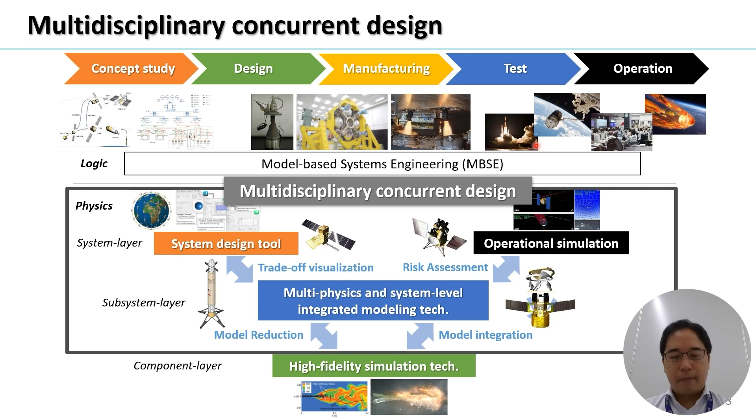Next, I'd like to introduce our target and application of the multidisciplinary approach in JAXA. First one is an innovative space transportation program. JAXA promotes research to acquire the innovative technologies necessary for the realization of the next generation mainstay rocket, aiming at significant cost reduction and new space transportation systems in the private sector.

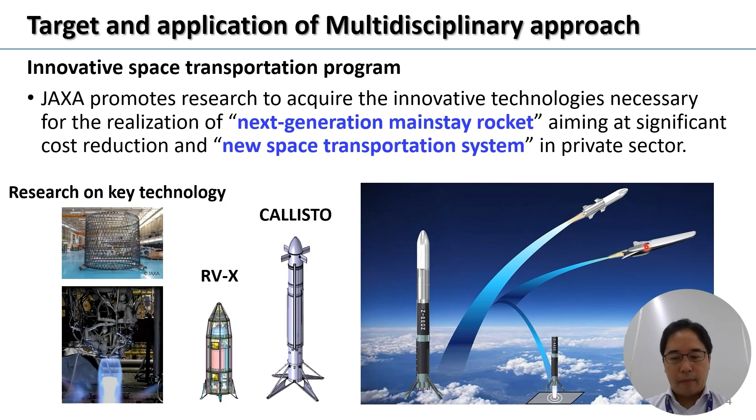Second program is an international space exploration program. When activities are extended to the moon and beyond in the future, it will be essential for Japan to enlarge its space transportation capability from the ground to the orbit and for the moon and Mars. To enlarge the range of space activities and possible missions, automated rendezvous docking technology is gaining importance. So, we are applying the model-based approach for the development of the automated rendezvous docking system in this study.

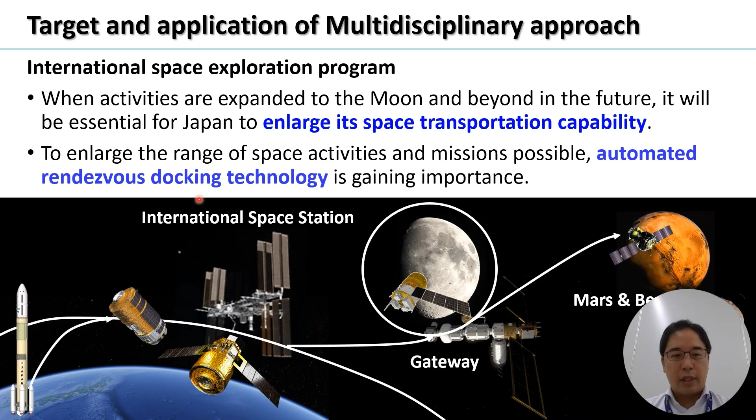So I'd like to start my introduction of the use case of the SimulationX targeting the reusable launch vehicle landing system. As you know, research and development on reusable launch vehicles are progressing worldwide with the aim of significantly reducing the cost. JAXA is also conducting flight experiments we call RV-X and Callisto to demonstrate guidance and control technology, propellant management technology, and between-flight reconditioning, which are important for realizing reuse.

RV-X is a small-scale vehicle demonstration by JAXA. We are going to carry out the ground test in Japan, and we obtained several test data to realize a reusable launch vehicle. And also, we collaborate with the French CNES and DLR on their demonstration of the reusable launch vehicle we call Callisto. We are planning a step-by-step approach to obtain the technology to realize the reusable launch vehicle towards the future application of the Japanese reusable flagship launch vehicle.

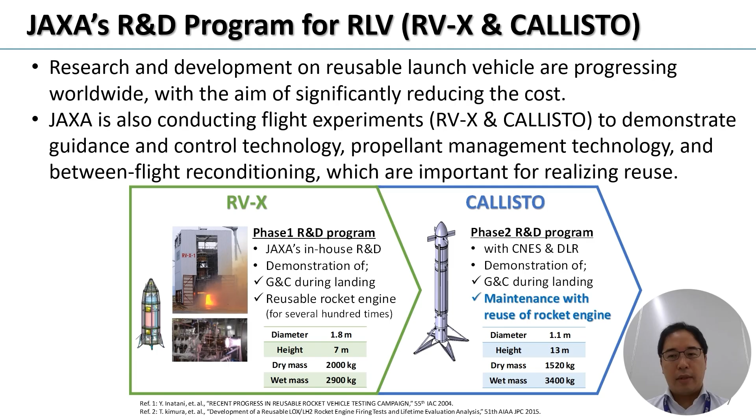JAXA is proceeding with model-based system design with the aim of responding to changing demand in the space transportation service. With a high-fidelity model, it is difficult to analyze a huge number of cases, such as in the upstream study targeting the launch vehicle. So it is necessary to achieve the appropriate analysis cost and fidelity required in the system upstream design phases.

We have heritage and knowledge with the high-fidelity simulation targeting the multi-body and mechanical dynamics for the spacecraft, and mainly we use ADAMS for this kind of study. We also apply ADAMS for the landing subsystem model for the reusable launch vehicle RV-X, and we carry out the model reduction for the system upstream design towards the future launch vehicle study in this step-by-step approach.

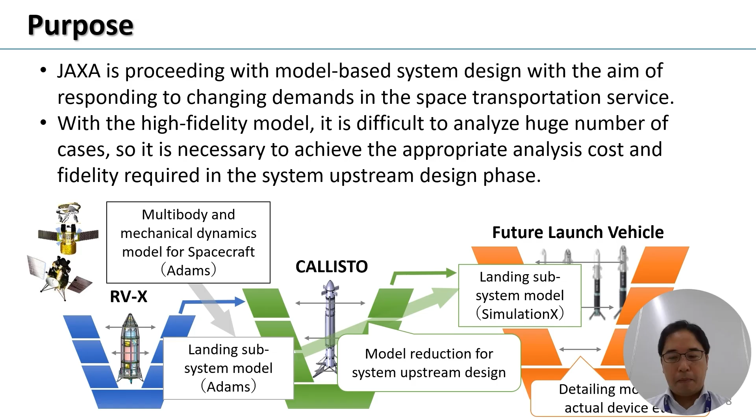At first, I'd like to show you the past ground test results of RV-X. RV-X drop tests with a full vehicle configuration model have been carried out to obtain the landing subsystem dynamic response as design verification. So we obtained this kind of data regarding the dynamics during the landing of the reusable launch vehicle, and we measured the speed, acceleration, deformation and strain for each point in this test.

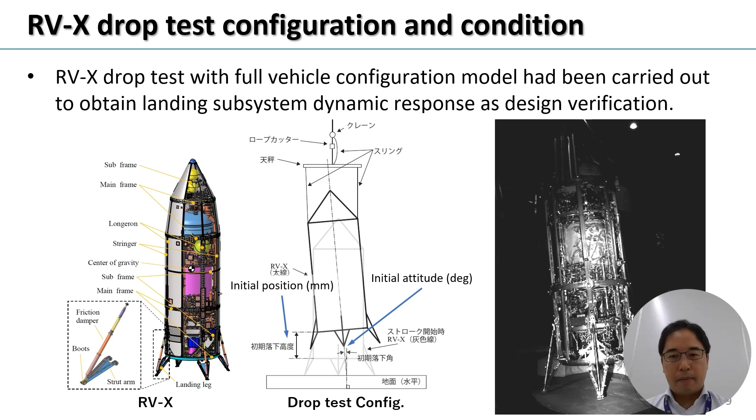We are using the model validation based on this drop test with the ADAMS model. By comparing the data obtained from the RV-X full vehicle drop test and the analysis result using ADAMS, we found that the test result and the analysis result agreed in terms of the stability evaluation.

This figure shows the time history of the X direction of the center of gravity of this vehicle. We have good agreement between the experiment and the calculation based on the high fidelity simulation with ADAMS.

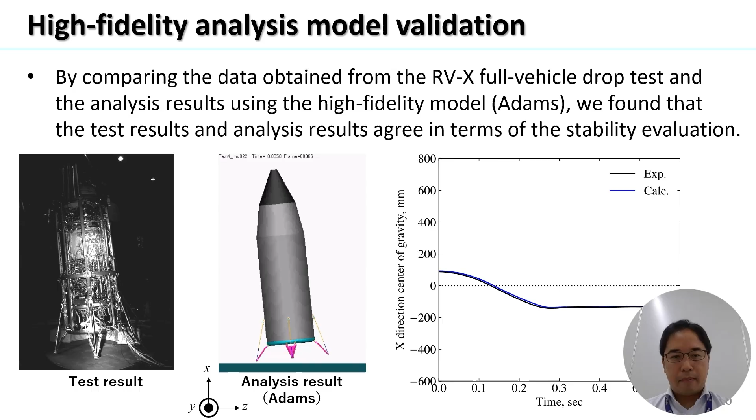Then we carried out the model construction for the landing subsystem using SimulationX, based on the knowledge or heritage obtained from the model validation with the ADAMS high fidelity simulation model. The primary and secondary legs are modeled using MBS elements of SimulationX. This multi-body system library covers several elements to model the landing subsystem, such as shown here.

We model the landing subsystem with elements such as the joint element, as shown here. And also, contact between the foot pad and the ground is expressed by the spring damper element of the MBS library, which returns a contact reaction force, shown here.

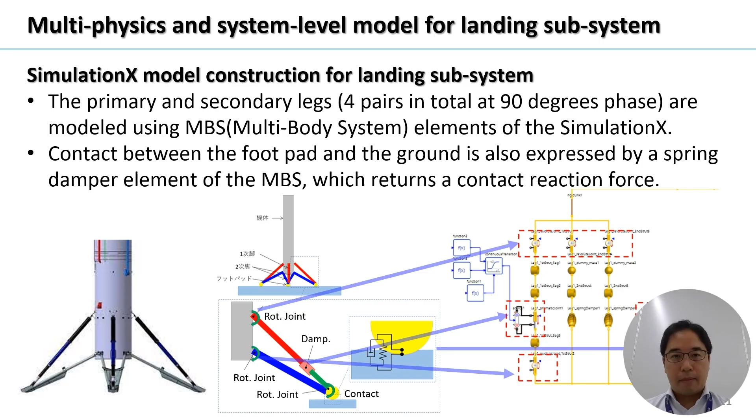Then we carried out the comparison between the high-fidelity analysis with ADAMS and SimulationX in this study. As you know, ADAMS considers three-dimensional shape in detail, but SimulationX expresses it with nodes to calculate motion of the object. In order to confirm the validity of the model, we compared it with the analysis result by ADAMS for the entire RV-X drop test, as shown here.

We successfully obtained a good agreement between the two analysis tools, and SimulationX succeeded in reducing the computation time, as shown here.

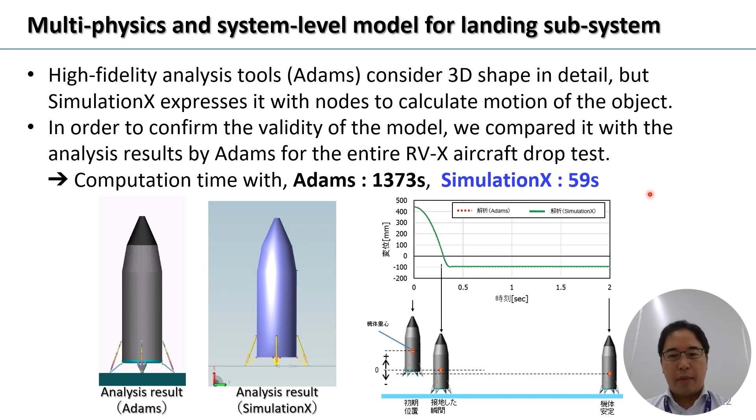We are now applying SimulationX for the upstream study of the launch vehicle. It is necessary to identify important characteristics and bottleneck technologies that contribute to vehicle system design, such as total system mass. Furthermore, from the perspective of robustness against weather conditions, such as the wind, during launch and landing phase, it is necessary to evaluate sensitivity through parametric study.

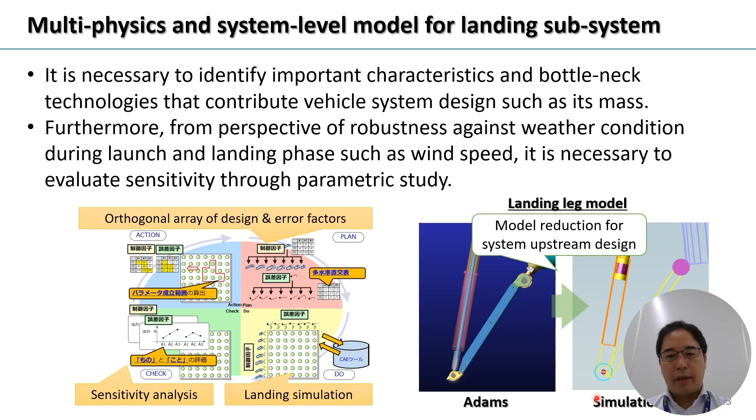This study was successfully carried out by SimulationX, which realized a low computational cost, targeting such a landing system. This slide shows the result using the SimulationX landing subsystem model. This model enables such parametric study with conditions such as landing vehicle attitude, pitch and yaw angle. And we obtain the distribution of stable or unstable behavior during the landing with this model.

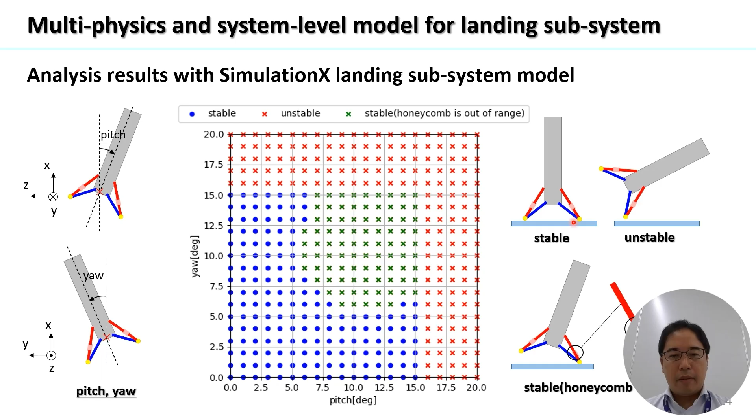I'd like to show you a sample case of this parametric study targeting the landing system. In this case, the vehicle successfully lands and keeps a stable attitude, as shown here.

The SimulationX landing subsystem model succeeded in obtaining good agreement with ADAMS for the other case. In this case, the landing leg is deformed and stuck due to the severe condition with the yaw angle. So we succeeded in carrying out this kind of parametric study of the landing system with low computational cost with SimulationX.

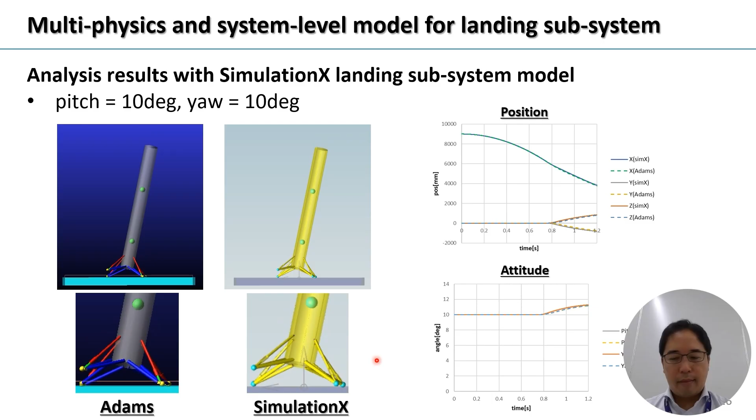Okay, I'd like to move to the other application, which is a spacecraft automated docking system. As you know, rendezvous docking is a key technique for space activities and missions, including in-orbit service and planetary exploration missions. This technology is gaining importance because it makes a wide range of space activities and missions possible.

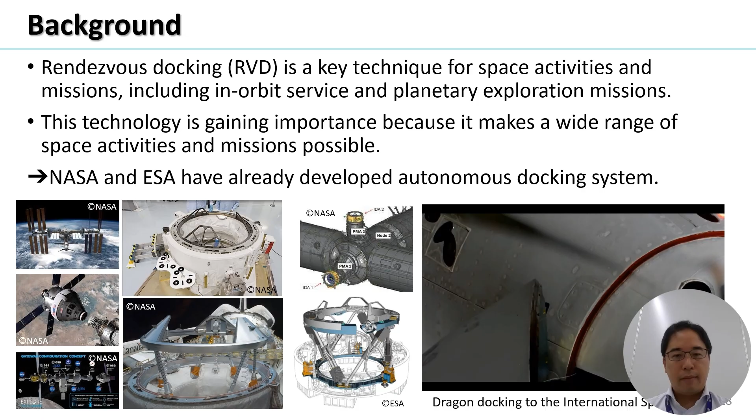As you know, NASA and ESA have already developed autonomous docking systems, as shown here, which are used for the ISS supply mission by NASA, and ESA is also using such techniques for the exploration mission. JAXA also carried out the R&D of the automated docking system.

We already carried out the demonstration of the rendezvous study, and we operate the HTV spacecraft for the ISS transport mission. And we have a plan for demonstration of the automatic docking system. It's the HTV-X, which is a successor of HTV, and we will obtain the automated docking technology towards the Gateway transportation.

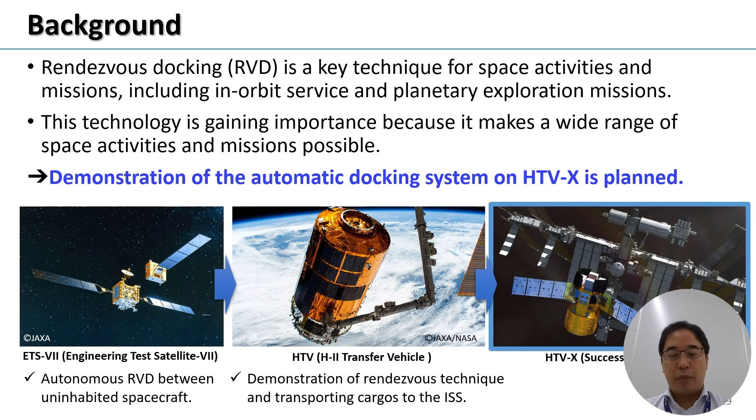This automated docking system requires reliability and robustness under a certain environment and various conditions to ensure mission success. Safety requirements cover not only nominal but also off-nominal conditions due to failure events during docking, to prevent harm to targets such as the ISS docking port. So the docking system needs to achieve a high level of reliability and safety.

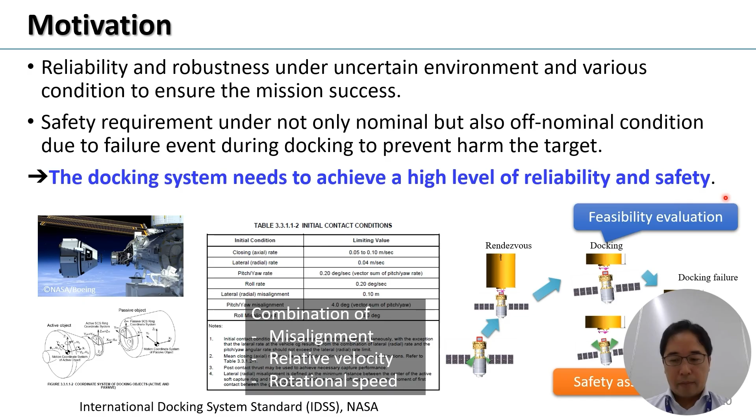But it is difficult to simulate the space environment, such as the gravity condition on the orbit, with a ground test facility. Ground tests require a huge cost and long time duration for the design, evaluation, and verification. Therefore, a model-based framework for design, evaluation, and safety assessment of the future automated docking system was constructed in this study.

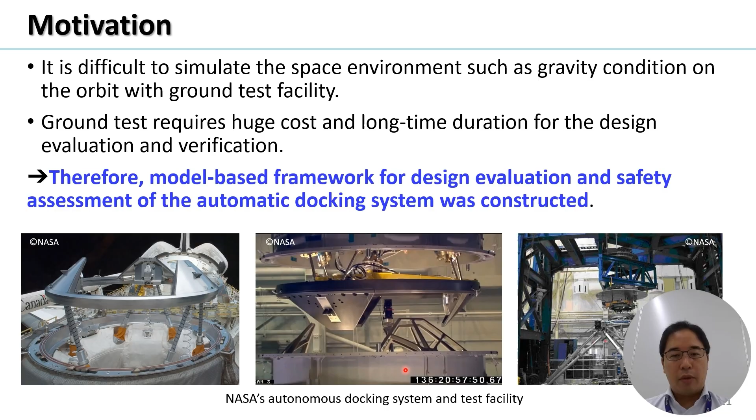To ensure system feasibility, its robustness against variations in operation conditions needs to be comprehensively evaluated. The model-based evaluation has been conducted by utilizing multi-physics system-level simulation techniques, as shown here. We are doing the model integration of this automated docking system, and we carry out the model validation with the high-fidelity modeling and simulation tools for key physics, characteristics, and parameters, such as the contact force shown here.

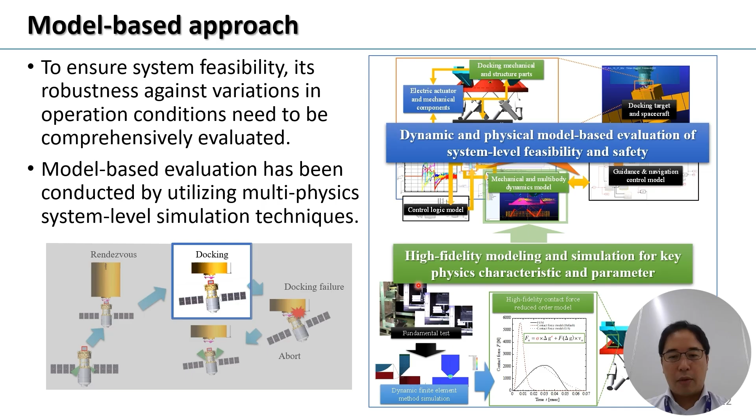The spacecraft automated docking system includes a dynamic interaction and complex relationship among control logic, electric components, mechanics, and also multi-body dynamics with contact force. Therefore, it is necessary to evaluate the entire integrated system, including each interaction across the multi-physics domain, as shown here.

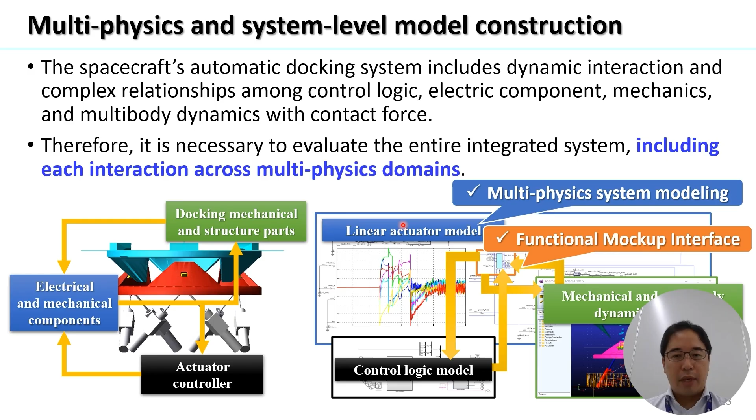We carried out the high-fidelity modeling and simulation for the key parameter. The accuracy of the mechanical model is improved by focusing on the key physical phenomena and building an appropriate fidelity reduced order model. The key is the contact force between the mechanical parts, as shown here. That's why we carried out the elemental test focusing on this contact force, and we carried out the high-fidelity modeling and simulation targeting this phenomena, and we obtained the anchor data to construct the reduced model and carry out the system level simulation.

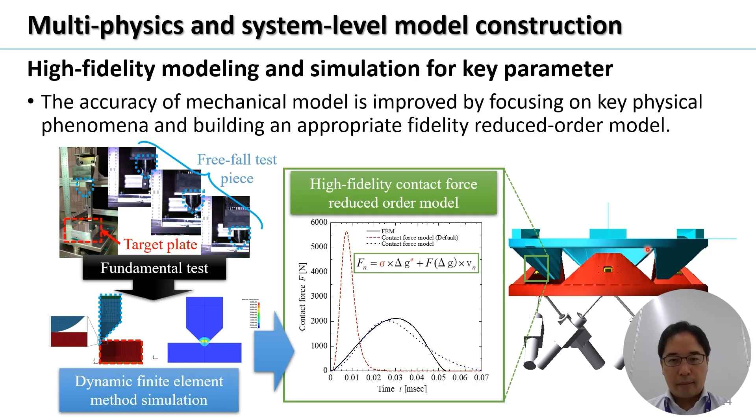Next, I would like to share the actual use case of this model. We carry out the assessment of the safety of this automated docking system. This system has several failure scenarios, and it might cause a hazard such as a collision with the ISS docking port. So this model was applied to the safety assessment in the trade-off of the safety measures to prevent this collision with the ISS docking system.

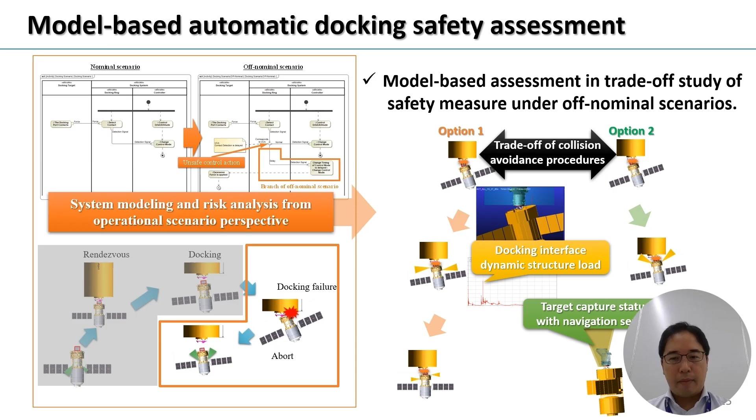A trade-off study from the perspective of safety in off-nominal scenarios was done using the integrated system level analysis framework covering the vehicle, ground, guidance, navigation and control, and also the automated docking system. In this trade-off study, two options can be considered as safety measures to avoid the collision with the ISS when the soft capture system docking fails. We carried out the trade-off study with option 1 and option 2.

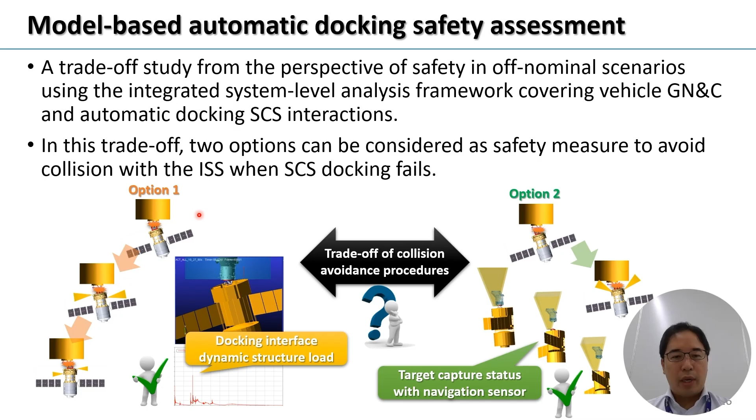Option 1 is to control the vehicle attitude to a stable position immediately after the docking failure is detected, and leave the docking target. In this option, the attitude control is performed where the soft capture docking ring and the ISS docking port are in contact. So there is a risk of excessive load. That's why we carried out the evaluation of the force during the collision using this model, as shown here.

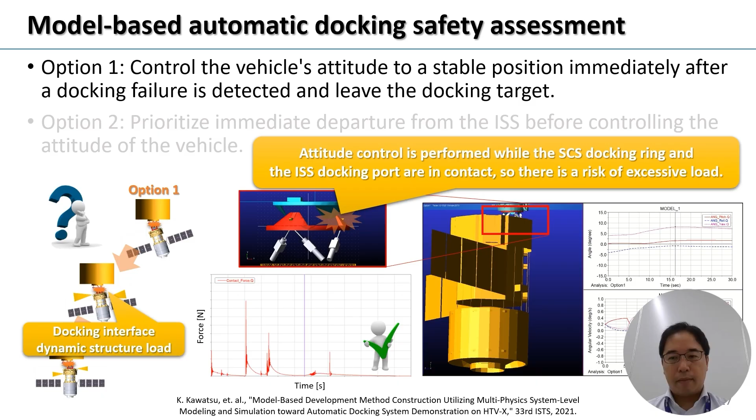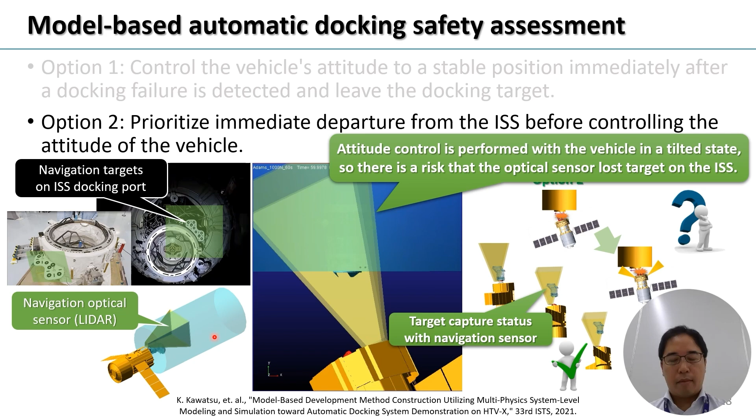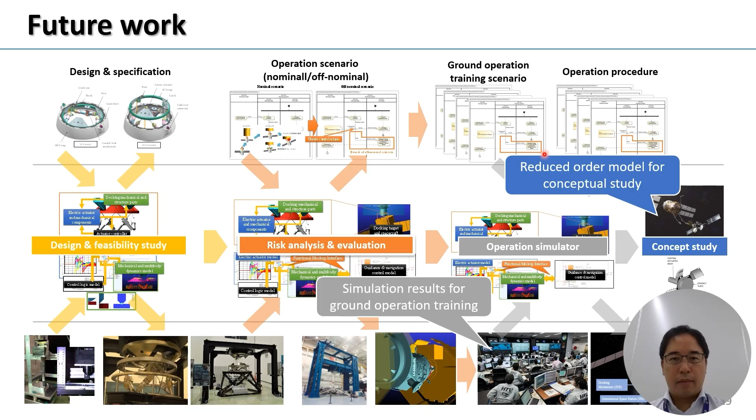So we carried out the model reduction using SimulationX targeting this automated docking system. We have used the high-fidelity model, focusing on the mechanical parts, collision, and dynamics. But SimulationX has the capability to model such kinds of mechanics and multi-body dynamics. So we concentrate on the SimulationX model to realize the reduction of the computation cost. And we are also using the JAXA supercomputer system, which enables a parametric study covering a huge number of sample cases.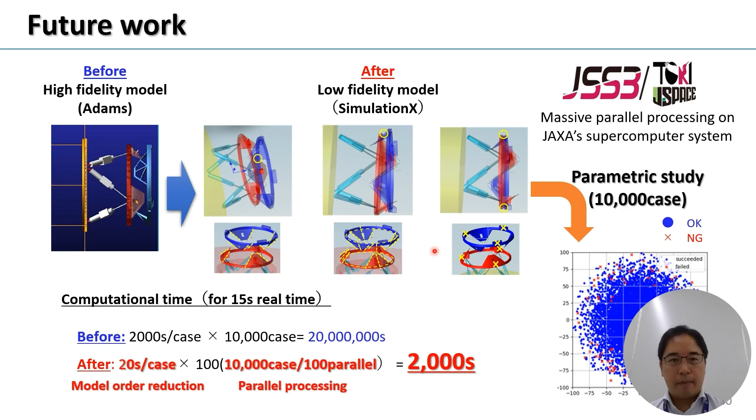Okay, I'd like to conclude my talk with this slide. In order to realize future space missions that are unprecedented and difficult, such as landing of reusable rockets and automated docking of spacecraft, it is important to determine feasibility and technical risk at an early stage. Furthermore, there are issues with the reproducibility of the actual operating environment and the cost involved in ground tests, making comprehensive evaluation difficult. Therefore, in addition to ground tests using conventional hardware, we carry out the application of the model-based approach in these activities.

JAXA has introduced a model-based multidisciplinary concurrent approach for mission feasibility and safety evaluation by focusing on the interaction of the complex physical domains to realize future space missions.